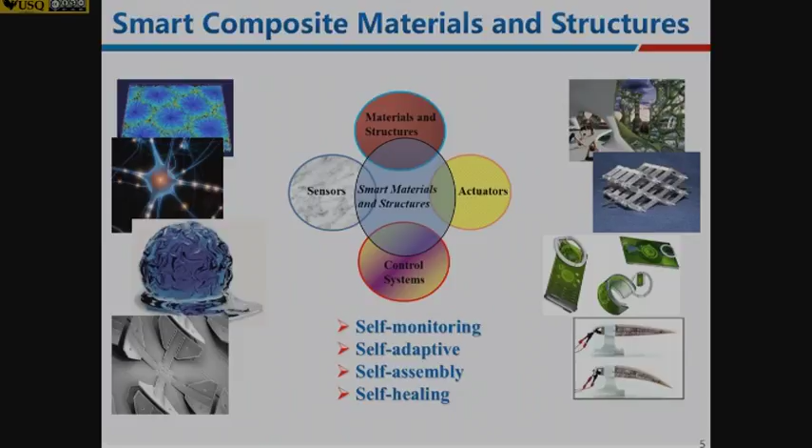Now I can start my talk on smart composites. So what is smart materials? Smart materials involve sensor materials, actuator materials, host materials, and a control system. When the environment changes, the sensor materials can sense the environmental change, then send a signal back to the central system, which sends a control signal to the actuators. These can control shape changing for adaptive structures, and also do self-healing in the future.

For my talk today, I will target the new smart polymer, the shape memory polymer, and its applications in deployable space structures, morphing structures, and other applications. Finally, I'll talk about some other research activities in our research group at HIT.

Let's start with the background. What is the shape memory polymer? It is one kind of shape memory material, based on polymer. This phenomenon is similar to another shape memory material called shape memory alloy. The initial shape for the shape memory polymer looks like this.

If you heat it above the glass transition temperature Tg, the material becomes very soft, meaning you can apply some load to change it to a different shape as desired. If you then cool it down below Tg, the material keeps that shape, meaning energy is stored. Then if you heat it again above Tg, the material recovers to its original shape. All of this phenomenon is similar to shape memory alloy.

But the key difference is that this is a polymer-based shape memory material. I want to show you a few more things: this is a pure polymer, and here it can also be reinforced with composites, even glass fiber or carbon fiber, and so on.

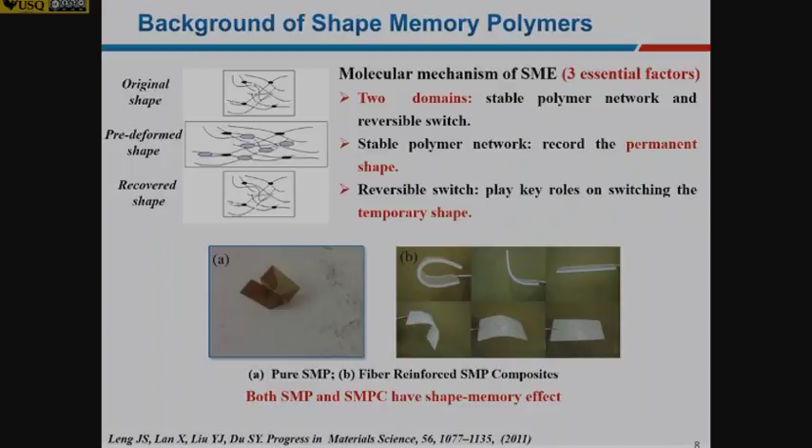So this is a comparison with the shape memory polymer and the shape memory alloy. The polymer, which is called SMP, has some advantages, like low density, large deformation, and also the required stress for deformation is only 1 to 3 megapascal, compared with another shape memory material, SMA, which normally needs 50 to 200 megapascal. Also the transition temperature range is wide, and the processing condition is easy. And very important, the cost is lower than SMA.

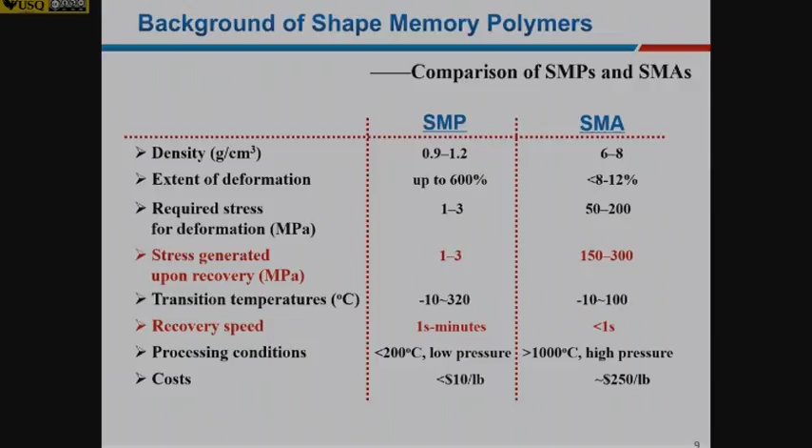But this also has some drawbacks. One is the recovery speed. Another is the stress generated upon recovery is lower than SMA. So the advantages I mentioned for the SMP include low density, biodegradable, and low cost.

But the main challenge is how to drive it. So with SMP, you can heat above the Tg using a heating gun or using water. But for real applications, you need to do something more.

So the solution is you can make some composite. To make a composite, you can have a new actuation method, and also improve the mechanical property and the recovery speed as well. So you take SMP plus filler, and you get a composite.

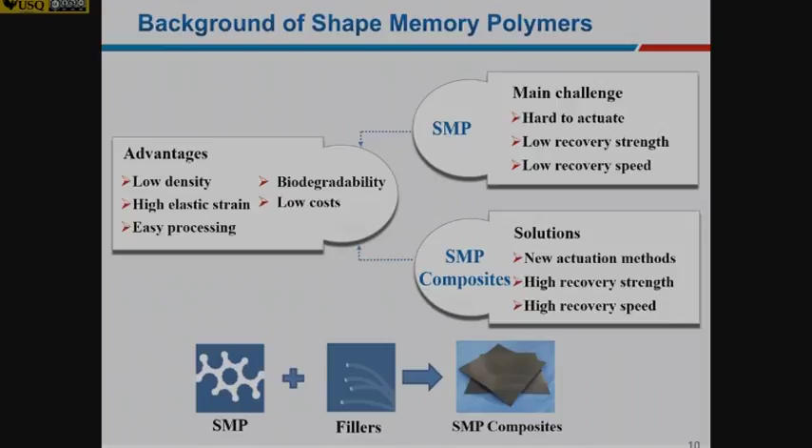So right now around the world, lots of people are working in this area. From Web of Science, you can see about 3,000 papers published. There are a few major research groups around the world.

From Air Force Research Lab USA, they target working with thermosetting shape memory polymers and also some composite structures. From Germany, Dr. Andreas Lendlein's school works on biomedical applications.

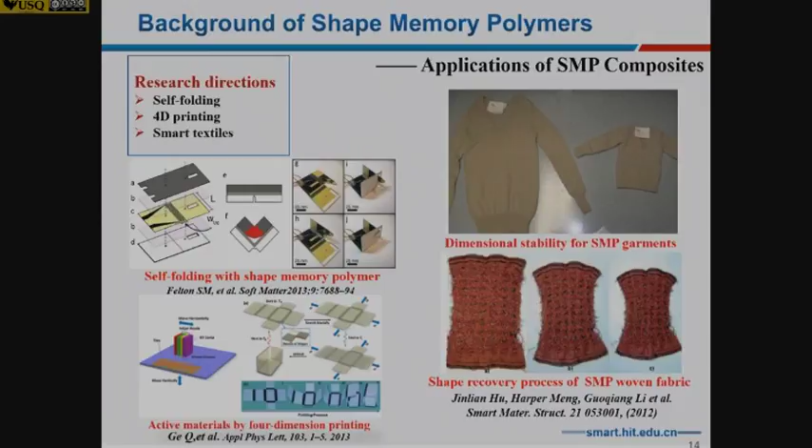And also there's somebody working from the US, Dr. Jerry Qi, working with 4-dimensional printing to print different kinds of smart structures.

So this is another way, using shape memory polymer combined with shape memory alloy. With this one, you can do two-way actuation, one by SMP, shape memory polymer, another by SMA.

The bottom one is from another of my colleagues, using photoresponsive flexible graphene oxide polymer composite. With this one, it looks like an equilibrium apparatus. With light, you can see from the movie this one is changing, driven by the light.

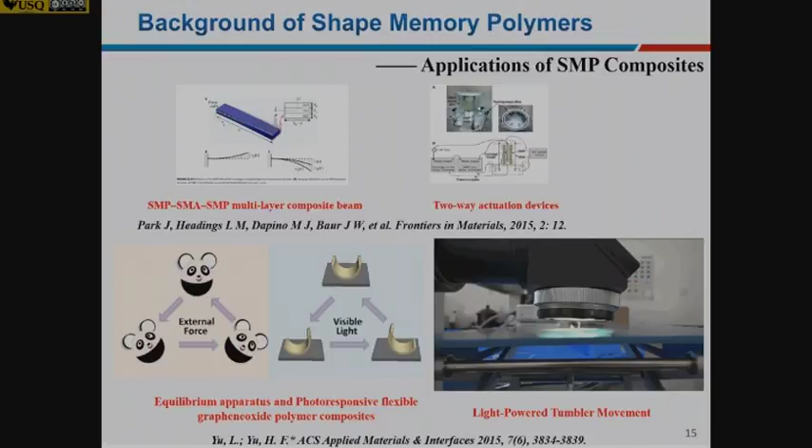So for the polymer, you have pure polymer, so you can do a lot of things. You have polymer matrix, you can make a fiber, you can make a membrane, you can make a foam, also you can make a composite.

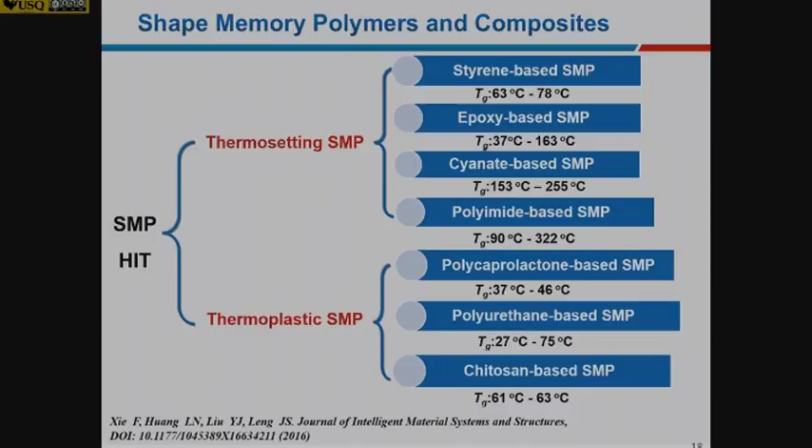So the matrix. In our group at HIT, we start making thermoplastic and thermosetting shape memory polymers with different transition temperatures. We start using polystyrene, which has a transition temperature around 70, then we go into epoxy, cyanate ester, which is around 250 degrees for the TG. And now we develop a polyimide, which goes to a higher transition temperature for SMP, 320. We also produce some thermoplastic shape memory polymer, which is used for potential biomedical applications.

So I'll take some initial published papers to show you what we have done during the last few years. This is a cyanate ester based high transition temperature SMP, so the range is around 250, and also we can see the recovery ratio is 98%. We also produce some polyimide, and with the polyimide, you can see the transition temperature is around 320. This one is also good with UV resistance. You can see with just 10 seconds, the sample can deploy.

And also recently, we published a paper in Soft Matter for the optic transparent high transition temperature polymer. This one is optic transparent, you can see this, and also I want to play the movie for you. I'm not sure if that one is working. Maybe I need to come back. Okay, I'll show you later, because this one is very useful for the future mobile phone.

Because in the future, we have something like a transparent and flexible mobile phone. The polyimide is a very good substrate to make that. So if we can have a flexible shape memory polyimide, we can make a lot of optical devices, especially for the flexible optic devices, like a mobile phone or something.

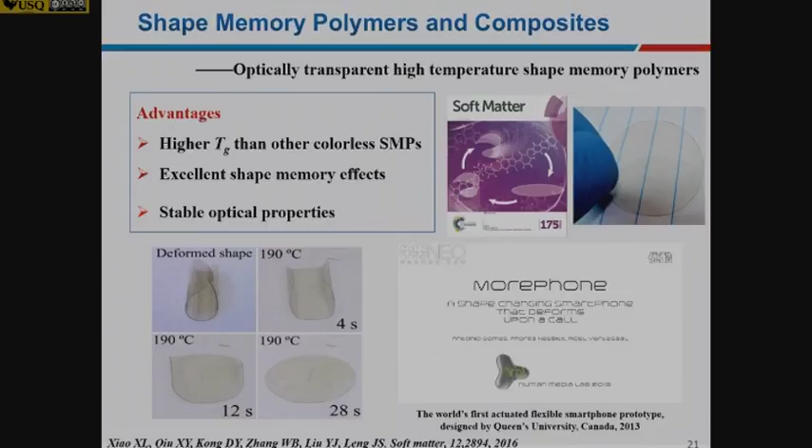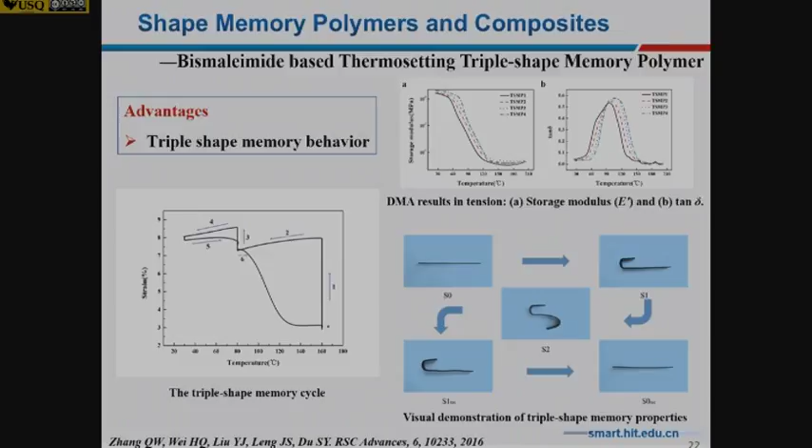So we also made some bismaleimide, BMI, which also has a triple shape memory behavior. That means normally shape memory polymer has just from 0 to 1, which is just one transition temperature, but with this one you have 2. That means this polymer can remember 2 or 3 shapes, so we call it triple.

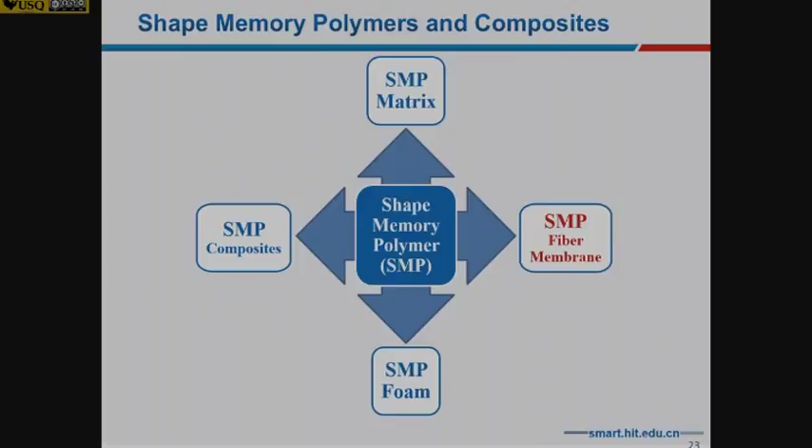And we can also make membrane, shape memory polymer, and fiber as well. So let's take some examples. This is one we made, a multi-shape shape memory polymer membrane. You can see from 160 degrees, 135, 110, they have different shapes, which means this one can remember 3 different shapes.

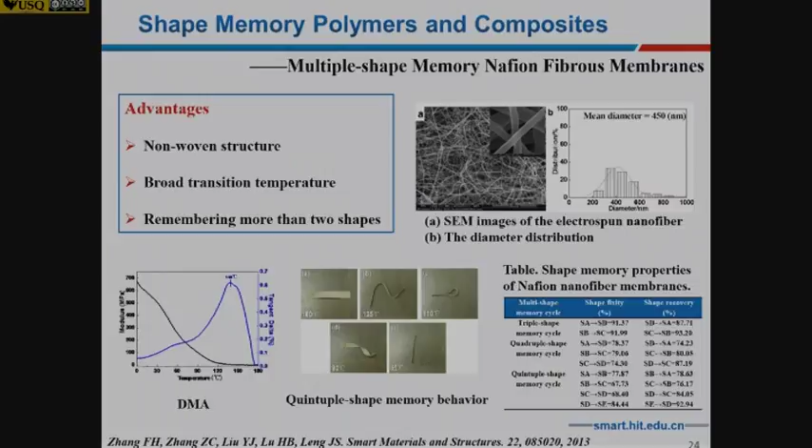And also this one, we made a core-shell shape memory polymer fiber. The initial idea is we have the shape memory polymer made by epoxy, which is shape memory, but this one is not biocompatible. So we make a core-shell with PCL together, and with this one you can have biodegradable property, biocompatible property, and also very fast shape recovery time.

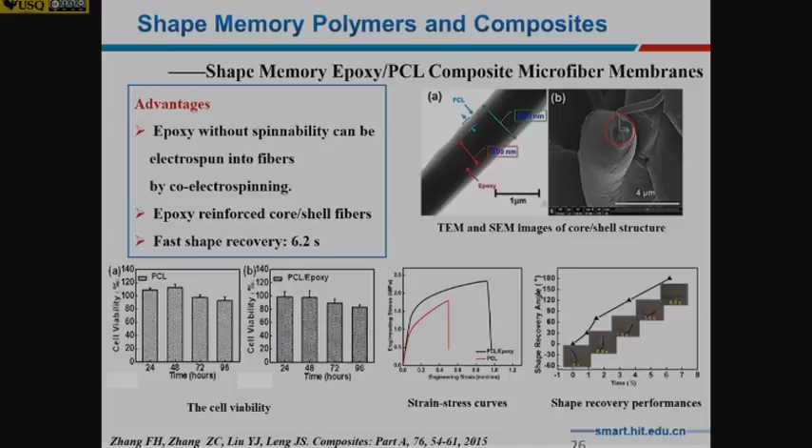And also we can make some foam. You see the foam made by PCL, and the initial temporary shape has 1 centimeter and 3 centimeters, and you can have a temporary shape of 1 centimeter. Then when you heat it by microwave or by water, this shape can change.

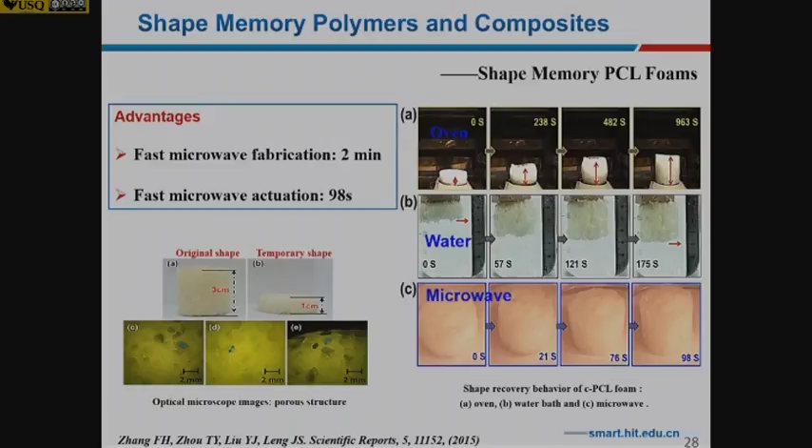So we also can make another one, which is polyurethane foam. With this polyurethane foam, the compression ratio can go up to 90%.

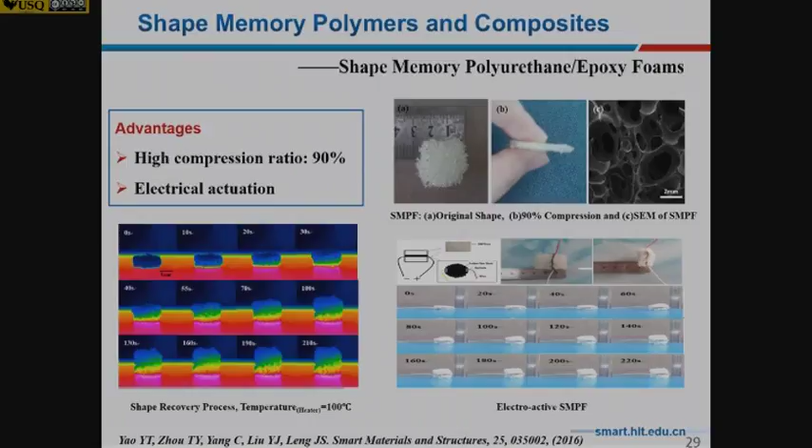So then we can make a composite. To make a composite, we can use a lot of different fillers. We can use nickel powder, carbon black, carbon nanotube, carbon nanofiber, or we can use graphene and reduced graphene oxide paper for electrical actuation during Joule heating. We also can do water actuations or magnetic actuations by using iron oxide, and also light actuations and microwave as well.

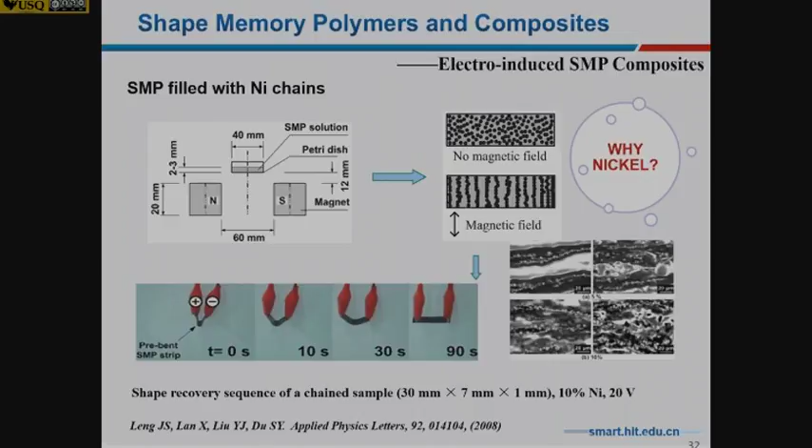Then you can simply apply some voltage to deploy this one.

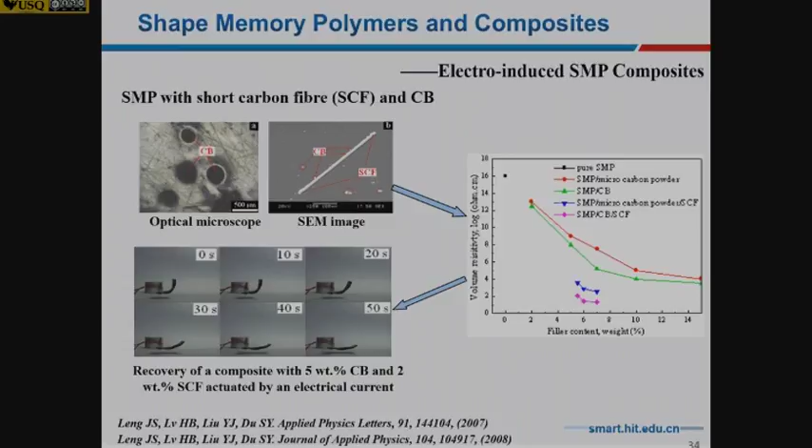So we tried a lot of different conductive particles. I don't want to say everything, but we tried a short carbon fiber with carbon black. You can see the volume resistivity down to 2 ohm centimeters, which is just 7% of the filler content.

For existing work, normally you need to distribute the particles inside the polymer homogeneously. But the problem is you cannot have too many particles, because they will reduce the other mechanical properties.

So the idea is we propose using another conductive element, which is called a buckypaper. The buckypaper is made purely of nanotubes. It has very good conductivity, so we can laminate it. This one is a composite, using the buckypaper as both a heating and a conductive element.

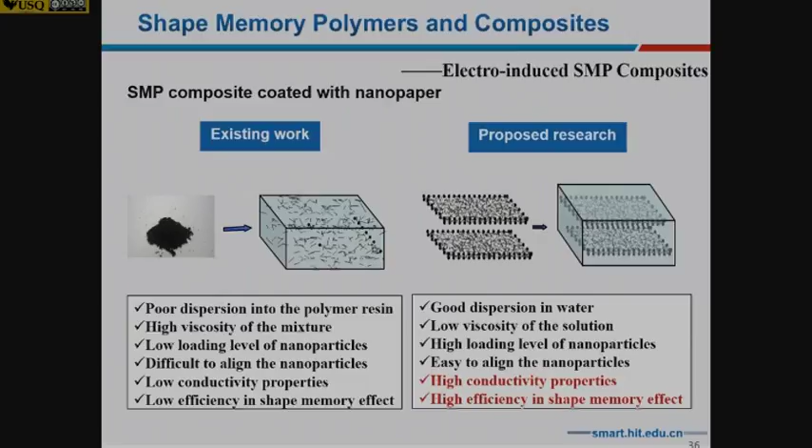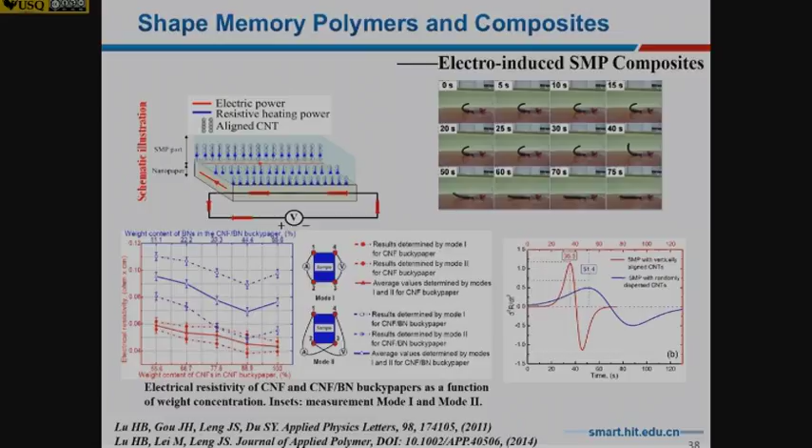We also grew some nanotubes just between the buckypaper and the composite SMP. The reason is the SMP and the buckypaper have different thermal conductivity, so we grew nanotubes just in between. This improves the conductivity, and you can see the induction time is reduced.

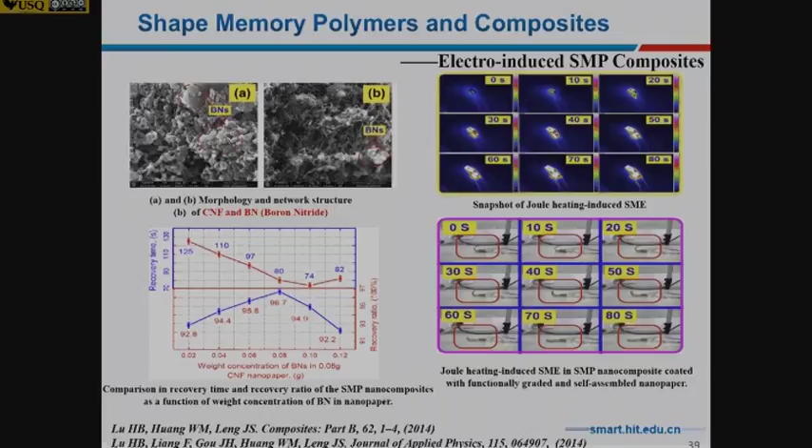We also tried different conductive particles, like carbon nanofiber plus boron nitride. The reason we're using boron nitride is it has very good thermal conductivity. With this one, you can see the sample can deploy from 0 seconds to 80 seconds very easily.

So this is another one where we want to do multifunctionalization. Because the composite is conductive, you can simply measure the resistance change if you apply some temperature or other stimulus. So this is a sensor, and this one can also change shape if you apply some stimulus.

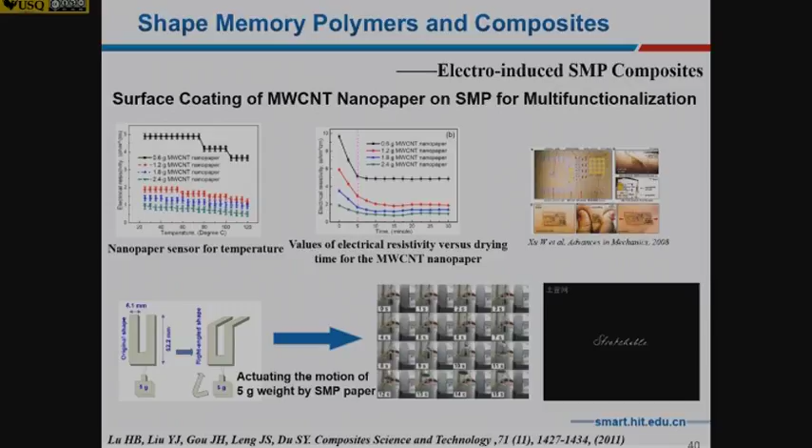You can see this is a mobile phone in the future. The mobile phone will be flexible and wrapped to your arm. So if we have the shape memory polymer as a substrate, in the future we can deploy this one easily.

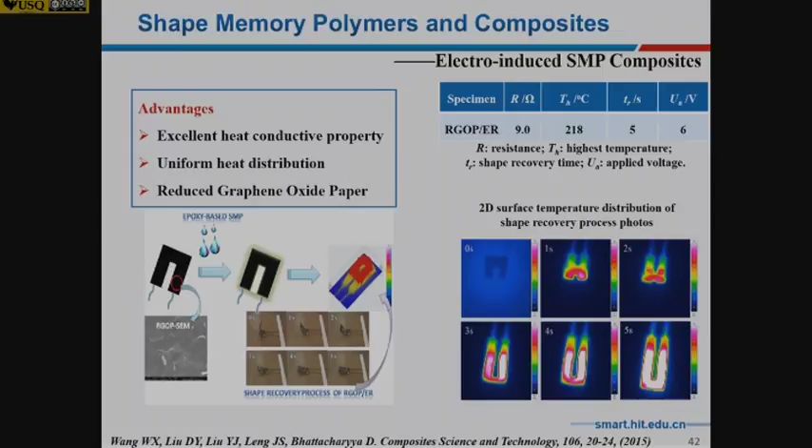We also tried another conductive paper, which is a reduced graphene oxide paper. For this one, it's all very fast. The graphene has very good conductivity. You can see the temperature distribution, and applying some voltage, this can deploy very easily.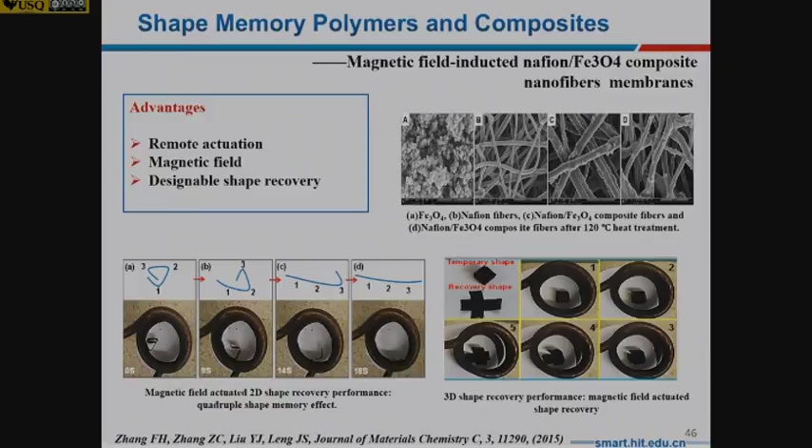So this is another idea using magnetic field. Since we're using iron oxide, which easily absorbs magnetic field, this can change in shape. You can see the polymer shape changing from A to D, the shape can deploy and change. So another design, you can consider mechanics with different magnetic particle volume and particle size to give different driving performance for the magnetic field.

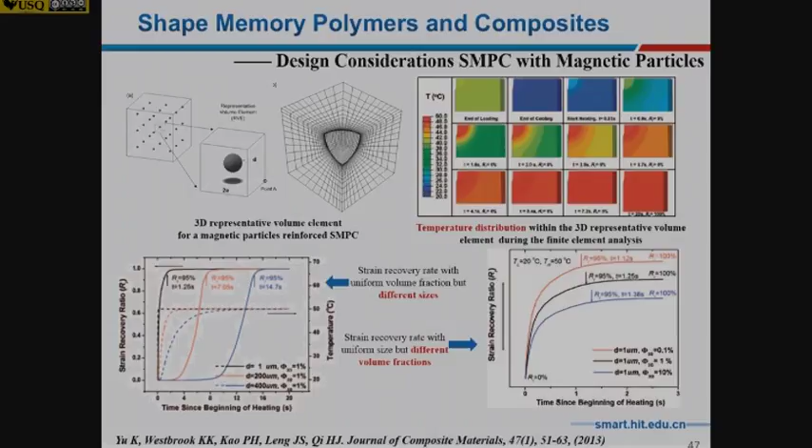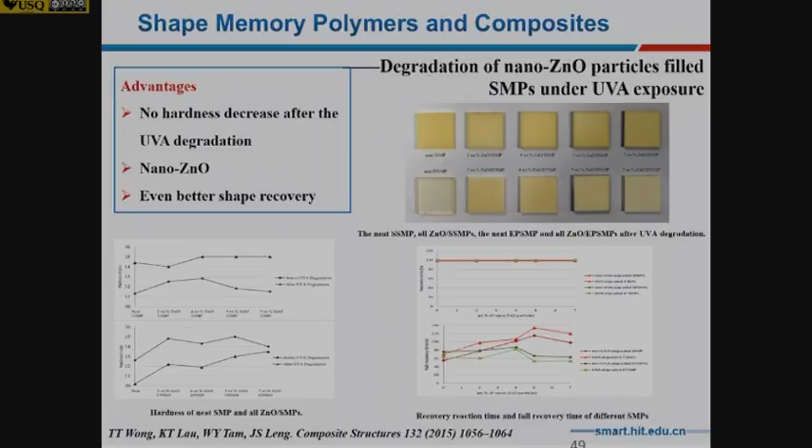We also collaborated with Lau, using nano zinc oxide particles to improve UV resistance, because zinc oxide has good properties to resist UV light. With this, we find the nanoparticles reduce degradation after UV exposure for the composite. This means you can try many composites to give different properties for the shape memory composite.

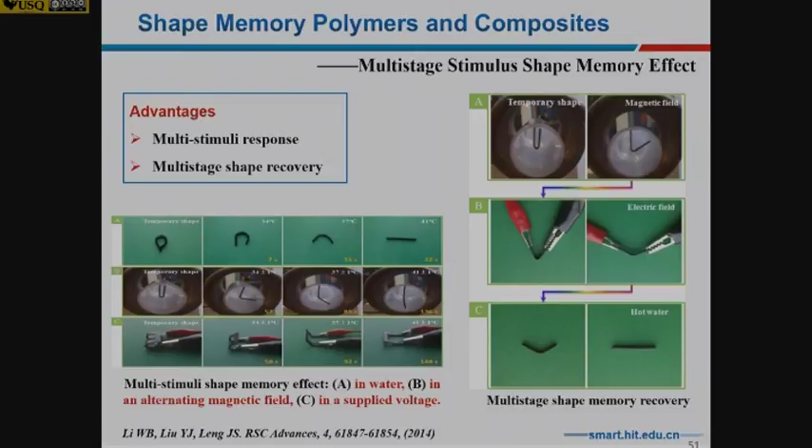We also made a self-healing composite with shape memory property together. For shape memory, you can see from the graph the shape can recover, but not only shape recovery - we put some thermoplastic polymer inside, which can heal cracks. You can see the crack there, and afterward the crack disappears. The self-healing efficiency is about 70%. This means the polymer can not only recover its shape but also heal cracks.

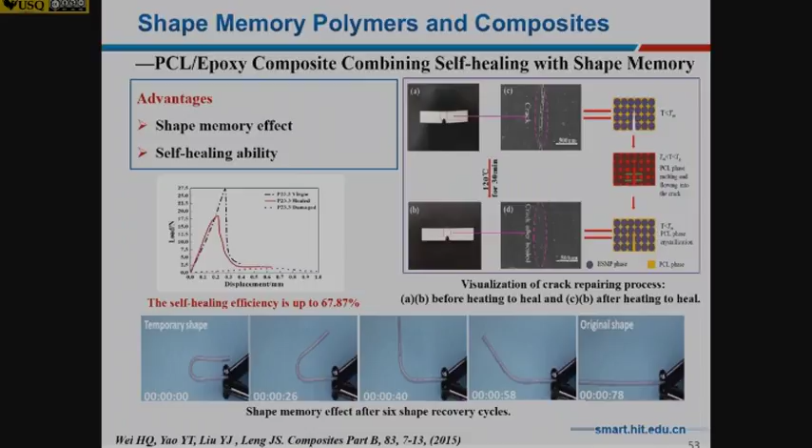Now I'm going to talk about some applications. The first application is deployable structures. Traditionally, you see this big antenna, 9 meters in diameter - very big. Traditional antennas use mechanical devices and complex structures, and to deploy, normally use explosive bolts, which are not very steady and have dynamic impact on the satellite body. For SMP, you can easily design it and just change shape upon a stimulus, which is normally temperature or magnetic field.

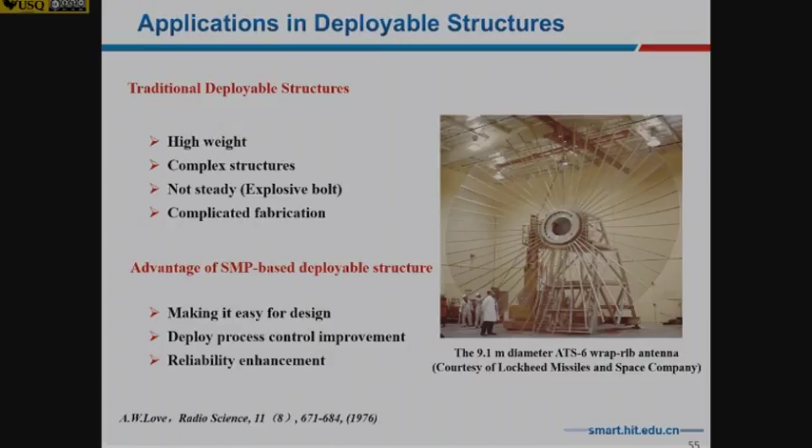But before doing that, we target a very harsh space environment - vacuum, radiation, atomic oxygen, and temperature variations. Here is the satellite, with the deployable antenna and deployable hinge, which normally uses explosive bolts. For low Earth orbit, the temperature is normally from -100 to 100. For high Earth orbit, we talk about -170 to 170 degrees Celsius.

That's why we develop different polymers to adapt to different temperature ranges. For epoxy, the temperature range can go up to 150, so that can be used for low Earth orbit, which is normally -100 to 100 - our epoxy is within that range. But that epoxy cannot be used for high Earth orbit, because high Earth orbit temperature is from -170 to 170. That's why we developed another higher Tg polymer, cyanate ester, up to 250.

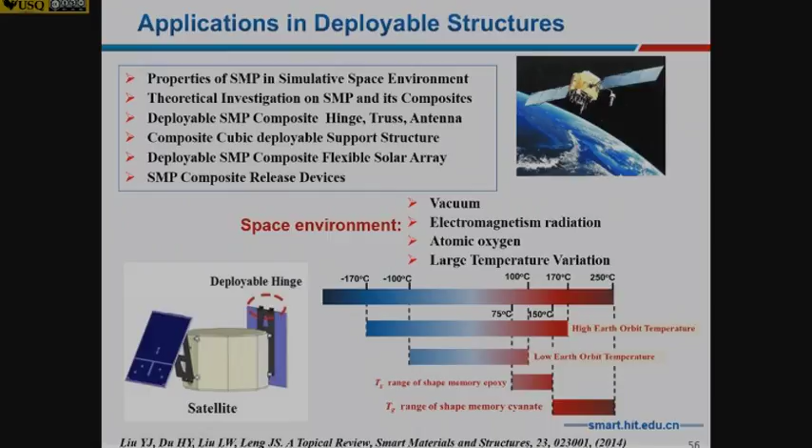So this is some published work for the epoxy-based polymer after gamma radiations. We can prove after different doses of gamma radiation and temperature cycling how the polymer performs - the recovery ratio, the mechanical property, the shape fixity. We prove that it's still okay after radiation at the temperature cycle. That means this one can be used in space for future applications.

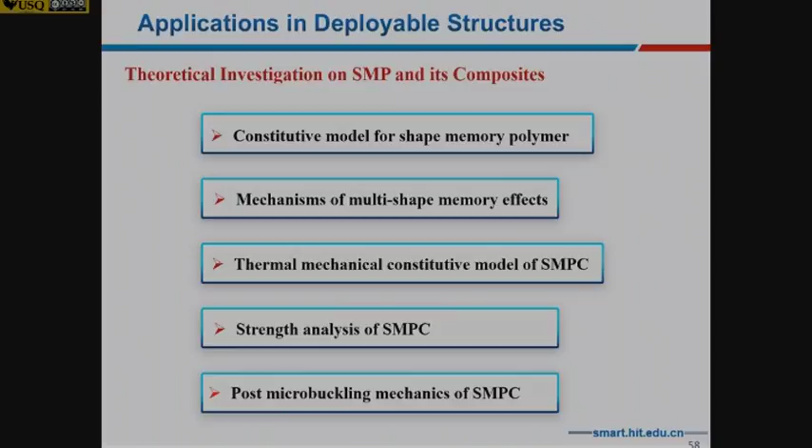We also did some theoretical work for the SMP and its composite - constitutive models. We started with the model of the shape memory polymer, the mechanism of the shape memory effect, and also the composite. So we do strength analysis and also post-buckling. I don't want to go into details, but I want to show you some models.

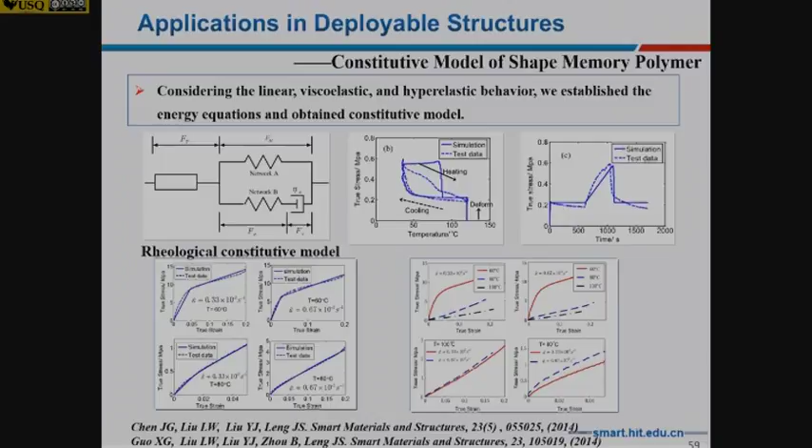This is the constitutive model for the shape memory polymer. Also, we try to simulate the multi-shape memory effect by using the standard linear solid model, which is there. You can see this one - we can simulate the triple shape memory effect.

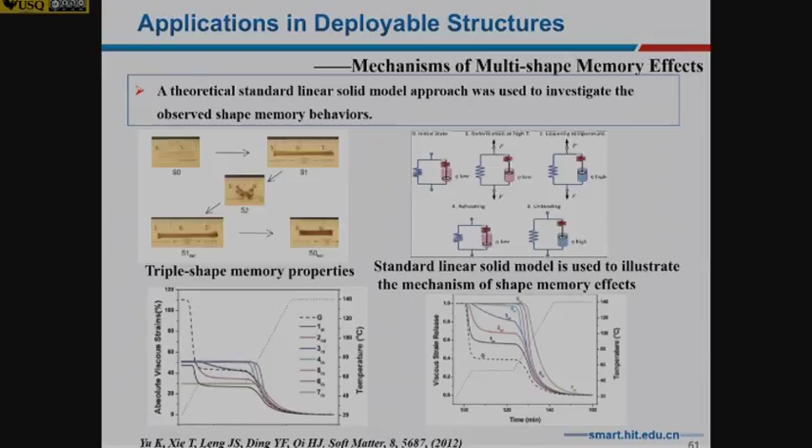And this one is a composite, so thermal mechanical constitutive model for the composite shape memory. You can see the glass phase and the rubber phase. I don't want to go into details, but this one is post-buckling, because for composites it's very important for the buckling. You can see the single fiber, you can see the polymer after buckling. So what we have to do is predict the wavelength and the amplitude of the buckling.

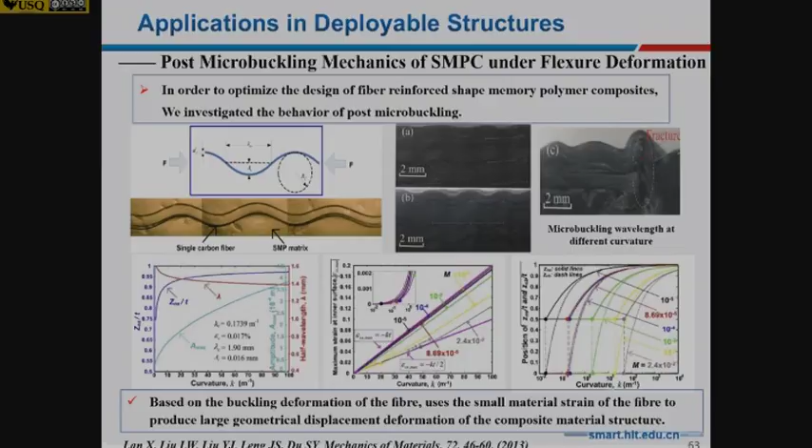So then we did some prototype design. This is a prototype design for a shape memory polymer hinge. From this one, you see the hinge is initially folded and then deploys after maybe 80 seconds, which you can control. And with this hinge, you can control the solar cell panel deployment just by heating.

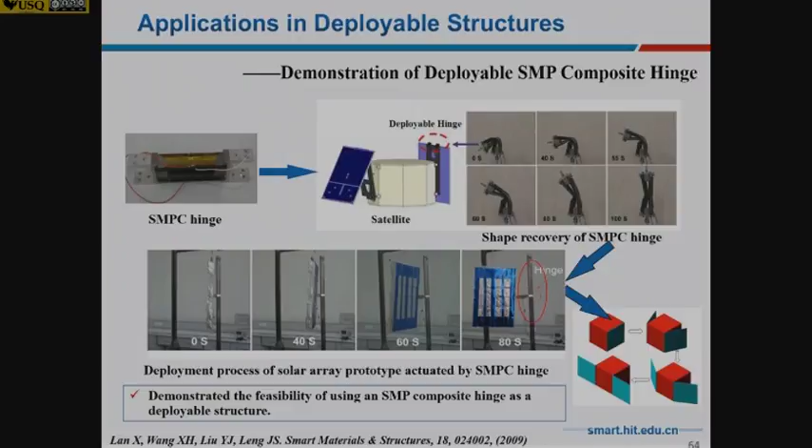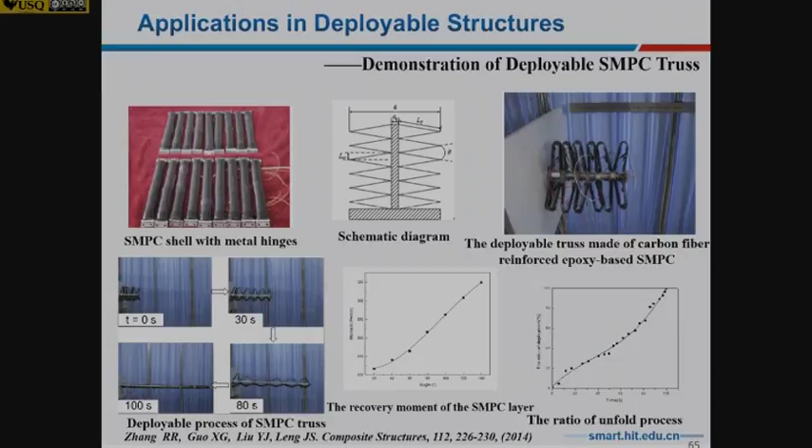We also made some truss structures. You can see the truss also made by composite plate. It's folded together, then afterward - you can see from the bottom one, from 0 seconds to 80 seconds - the truss can deploy if you simply apply a heating source.

We also made some release devices. The basic principle is like two parts, like my fingers holding together. If you want to release, you simply change this shape, then it can release. And also this can come back and lock.

So then we're going to talk about some applications in morphing. This one is a morphing aircraft by NASA. They want to have this concept by 2030. So in the future, the aircraft hopefully can change shape if you want.

And can I play another movie, please? Nobody here? Okay, it's coming.

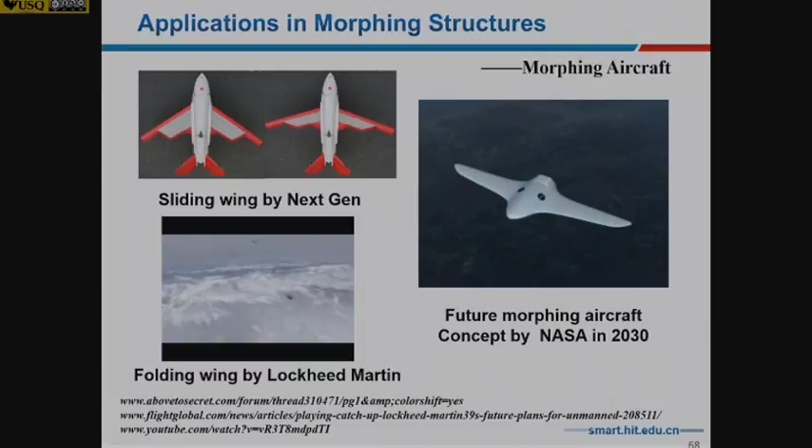You can see this is by Lockheed Martin. They want to have this UAV fold a wing, and then after the mission, deploy again to come back to the normal status.

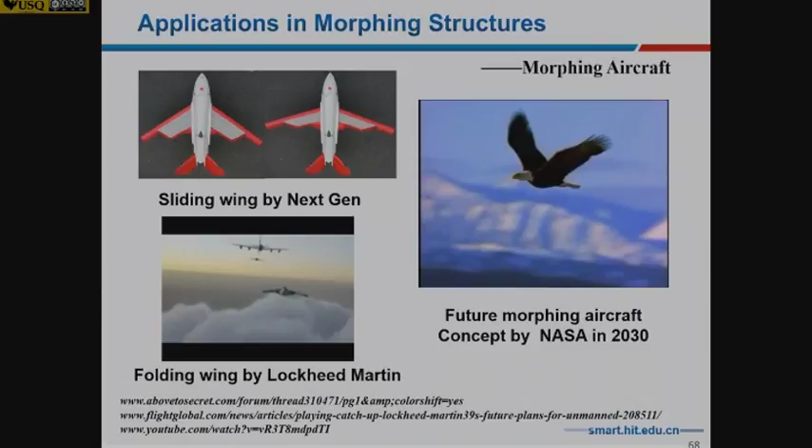But the target for this one is very important - the morphing skin. Right now, the next gen company is working with flexible skin using rubber. But the problem for morphing is you need shape changing, which requires low stiffness. But low stiffness means you can change your shape but cannot stand aerodynamic load. High stiffness means you can stand aerodynamic load but cannot change your shape.

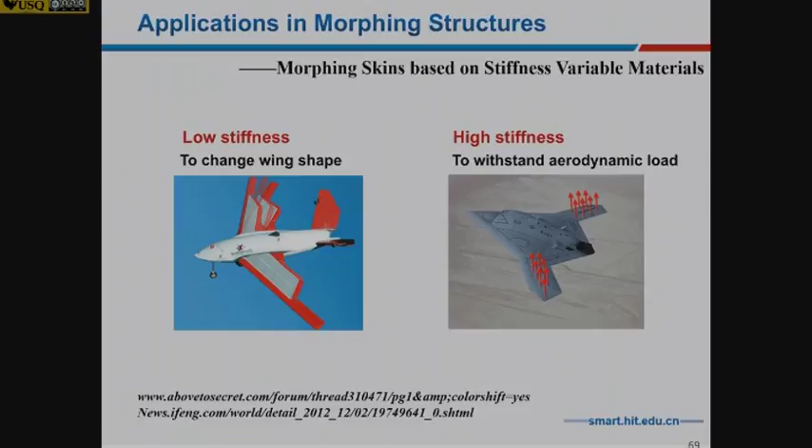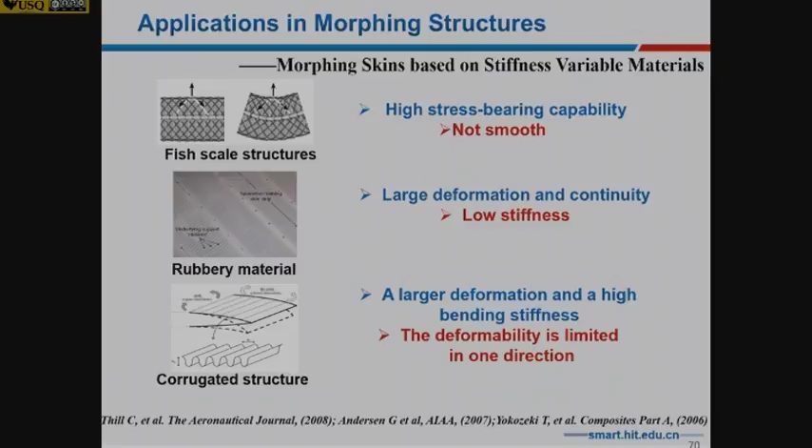So that's why we need stiffness-variable materials. If you want shape changing, you need low stiffness. If you want to stand higher aerodynamic load, you need high stiffness. Right now for morphing skin there are at least three approaches. One is called fish scale structures, which is like fish scale but not smooth. Another is rubber materials, which can be reinforced with filler, but that has low stiffness. Another is corrugated structures, but the thing is it only changes in one direction. So what we propose to do is use shape memory polymer.

Remember this one in the very beginning, SMP can change in stiffness from very hard to very soft upon the stimulus, then you come back. So we're not using SMP to drive the morphing structures, that's too heavy. But we're using this one to change the stiffness, as variable stiffness materials.

So we've done some work with morphing skins using pure polymer, but we found pure polymer has some problems. So we reinforced it with spandex. The reason we're using spandex is it's very flexible.

So we also make some tube. The tube is also made by shape memory polymer composite. The tube can change in stiffness. So we embed the tube in some soft polymer like elastomer, so this polymer can change in stiffness.

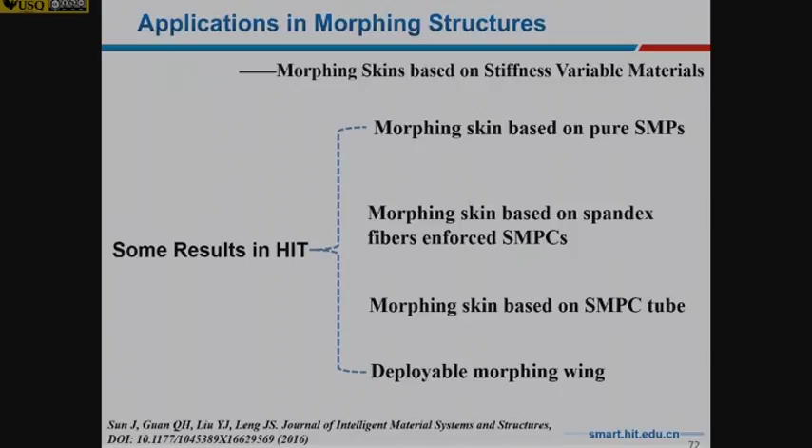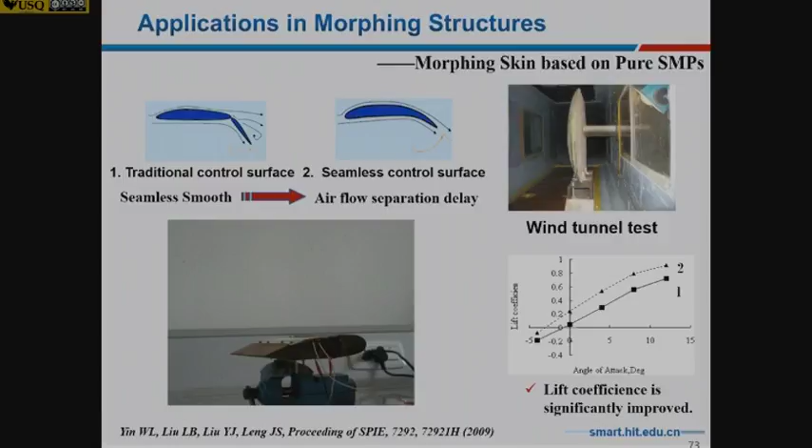And also we make some deployable wing. You can see this one we covered with SMP, and we do wind tunnel testing. This is initial work.

Then we go to the spandex-reinforced shape memory polymer composite. With this one, you can improve the tear strength using the flexible elastic fiber, which is spandex.

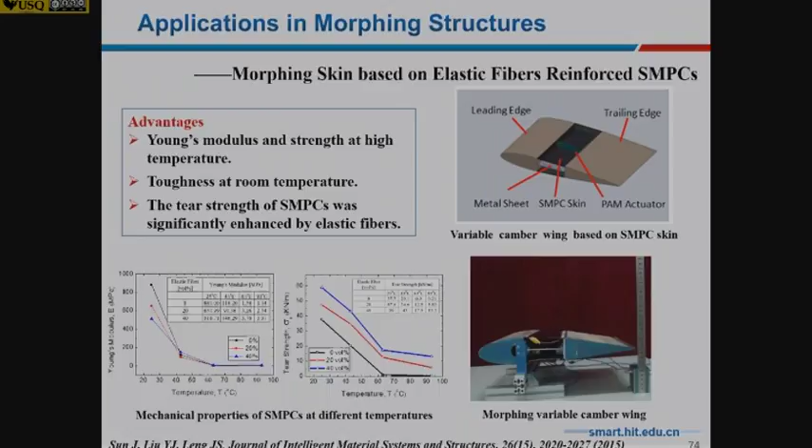We make some deployable morphing wing using shape memory polymer and foam. You can see the foam can change in shape. That means it's not only deployable for the wing, it can also change the airfoil. You can see the airfoil can be changed.

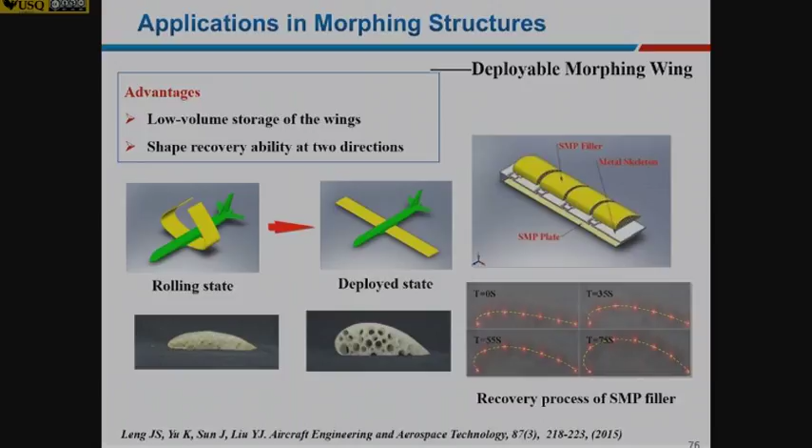So, other applications. The first one I want to point out is the smart mandrel. This has a lot of applications. Normally to do composite structures, like pressure vessels, complex structures, when you do filament winding, you have to have some mandrel.

But the mandrel normally you can make either by the water-soluble mandrel, which can dissolve by water or other solution, or you can make a multi-piece metal mandrel, which can be assembled and disassembled, but it's very complex. So people from a USA company called CRG made this one.

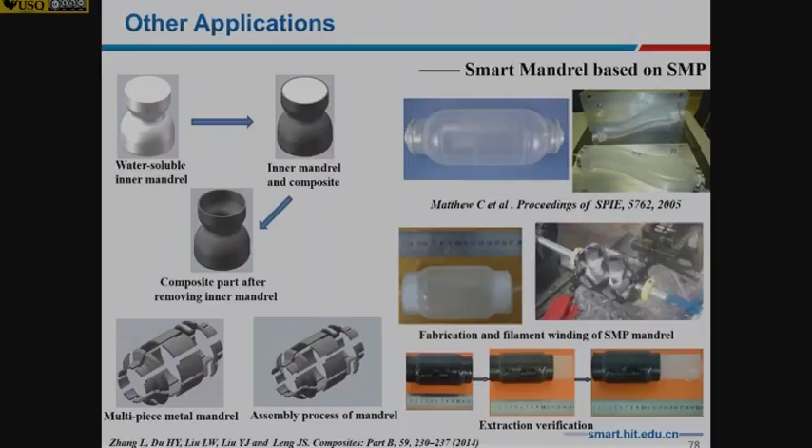And on the right hand side is another air inlet. For this one, you can do the composite structure, then release it after you do filament winding. And the bottom one, our student made, doing filament winding with a similar idea, and after that you can release and take off the mandrel easily.

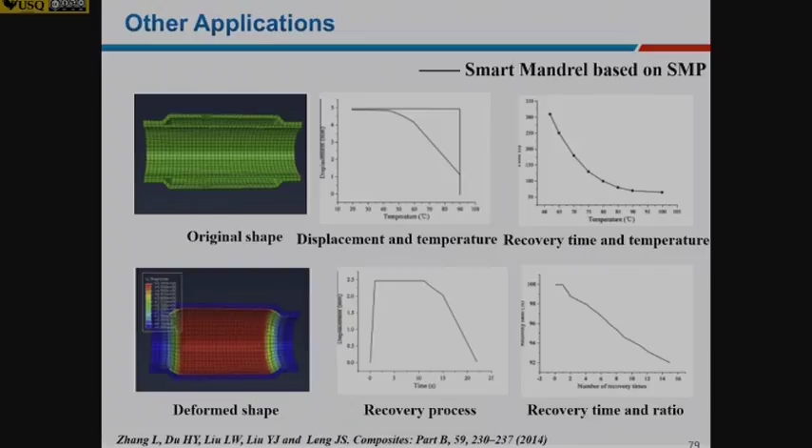And we've also done some simulation work using FE modeling to see the deformation and stress distributions. So this is another one for the air inlet.

You see one side is circle, another side is rectangular, so normally it's not easy to take off after doing filament winding. But with this one, SMP does the filament winding, and after that the polymer becomes smaller and soft, then it's easy to take off from the composite tube inlet.

So we've also done some simulations. This is another one we call adaptive fracture external fixator based on SMP.

When you have a broken bone, it has an original state with swelling, and when the swelling goes down, the shape is reduced. So using shape memory polymer we can fit this. If you're using a plaster, normally the plaster cannot change shape, but with this one, you can change shape.

And also for the joint, you can move to exercise, which plaster cannot do.

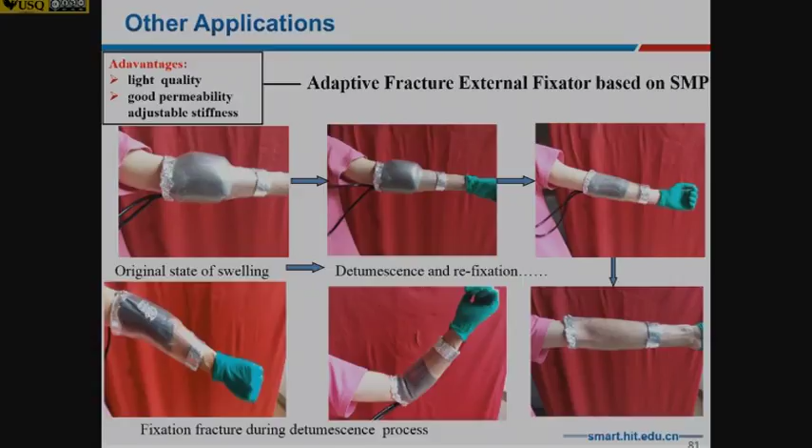So the idea for us is we made some shape memory polymer sheet and film, very thin. Then we heat it and it becomes soft, then we use a pen to make some dots. Then you reverse it, and you can feel what it means. After that, you can reuse it by heating again.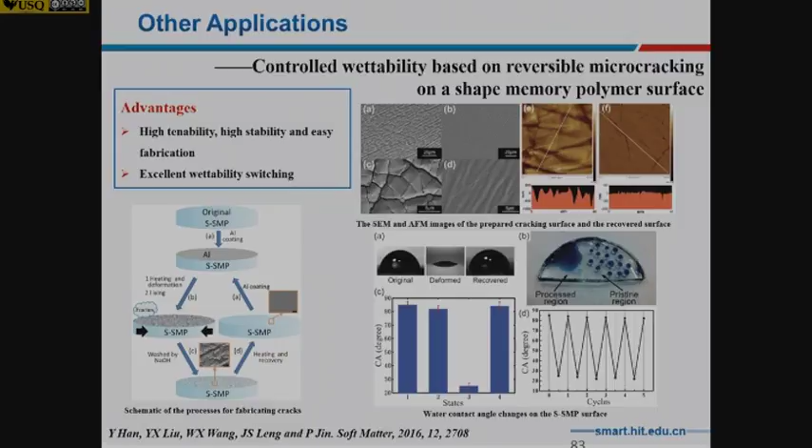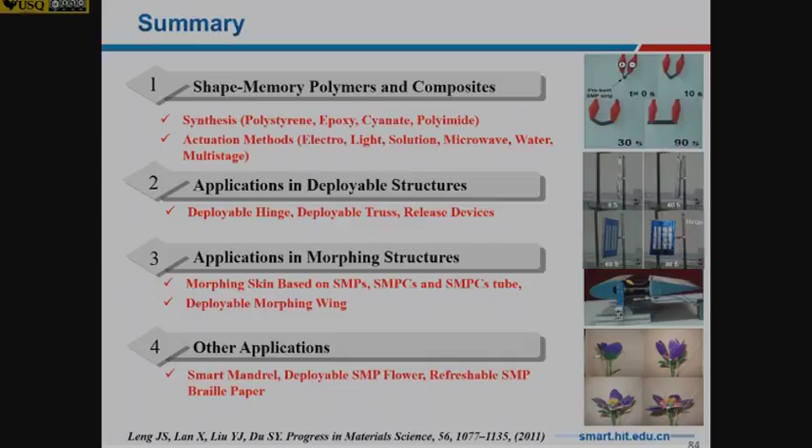So with that, I want to summarize. We talked to you about shape memory polymer. In our university, we can do synthesis, composites, deployable structures and morphing structures, and other applications.

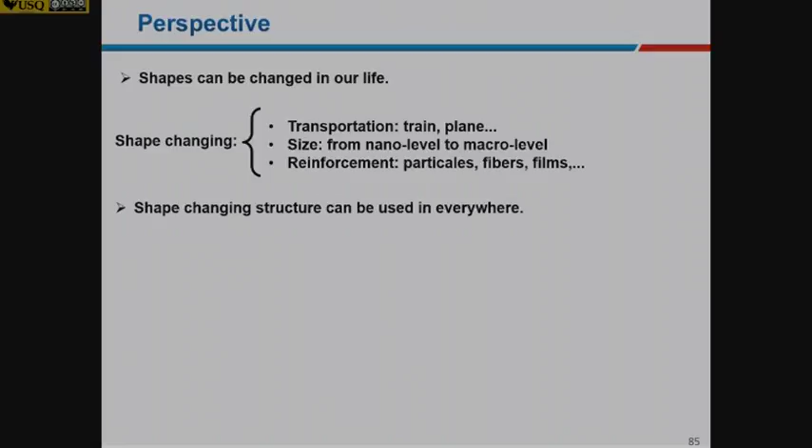So I think for the future, shape can be changing in our life, changing whatever - like cars, like trains, like transportation, like planes, or something you can see like the transformers.

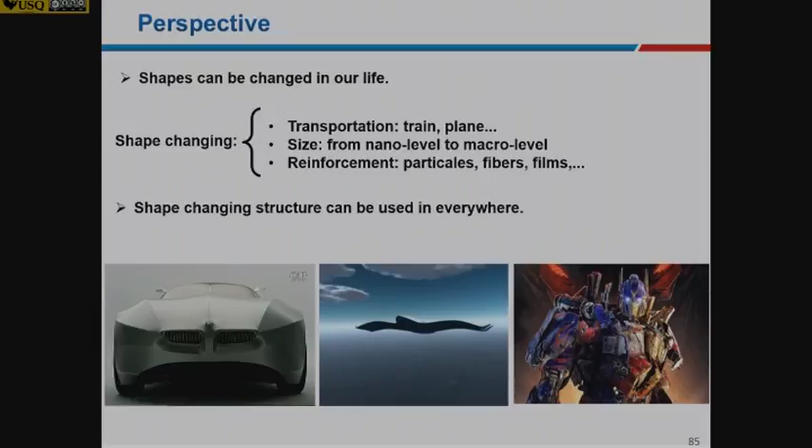So size can be small, from nano to macro to micro. And the reinforcement can be like a particle, fiber, or film. So shape changing can be used anywhere. I also want to introduce some other research activities in our research group.

The gripper is made by EAP, the electroactive polymer, and they can grab something.

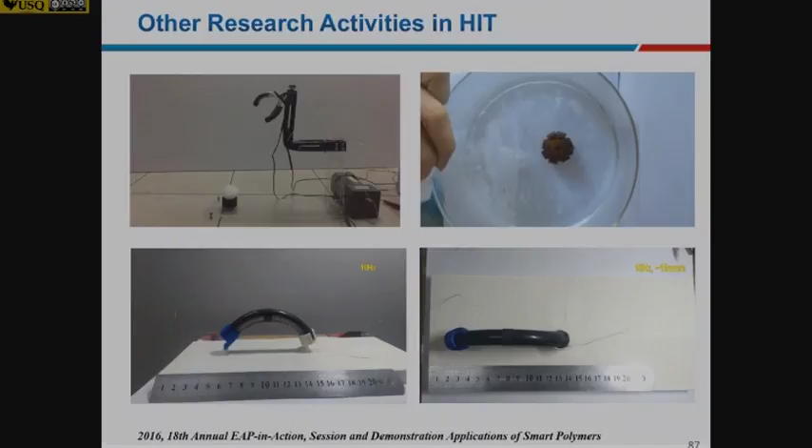This was demonstrated this year in Las Vegas. This one is another one, it's called flower, and you can see this flower can deploy. And this one, you can see it crawl, and this one as well, can move.

We also made some pneumatic muscle fiber, which we embedded in some composite. You can see this one can also change shape - these are actuators. We also made some piezoceramic pump, which is here.

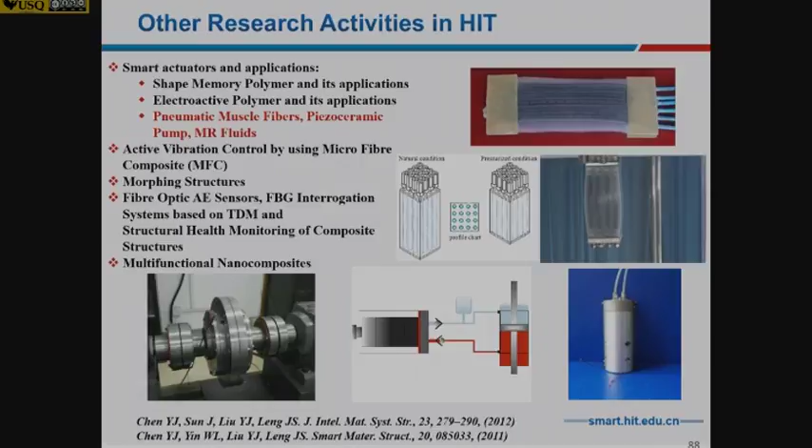This one is called the pneumatic muscle fiber, PAM. We have some collaboration with the University of Maryland. Sorry, there's no movie playing, but you can see it. It can lift, and you can also grab some things with this PAM.

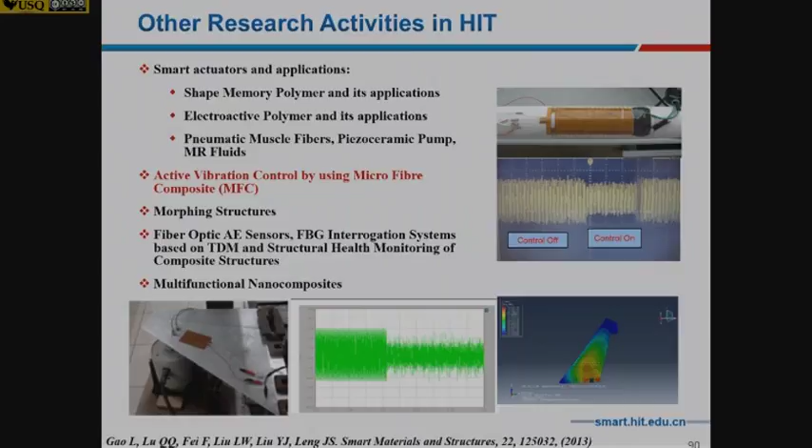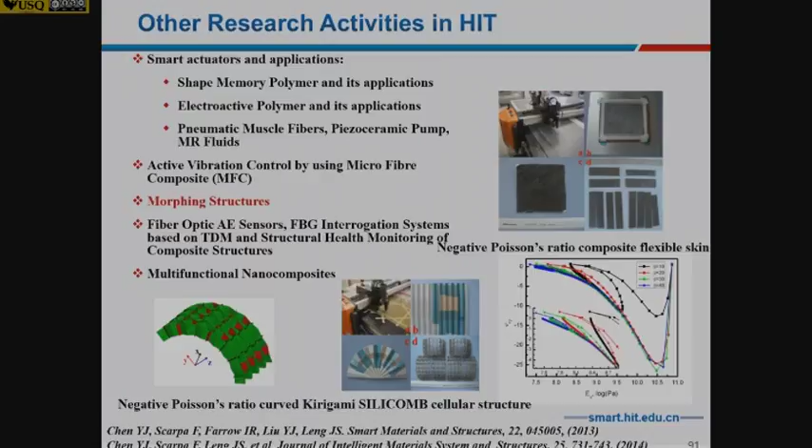We also have some work on controlling vibration by microfiber composite, and some morphing structures, like this one, called the Kirigami SILICOMB cellular structures, and also this one with negative Poisson ratio design for the flexible skin.

We're also working on fiber optic sensors. With fiber optic sensors, we do something based on TDM, time division multiplexing. With this, in principle you can get 1,000 sensors in one channel.

So this is another design. We're also working on acoustic emission sensors, for when you have some impact and damage. You can locate the location of the impact using the acoustic emission sensors.

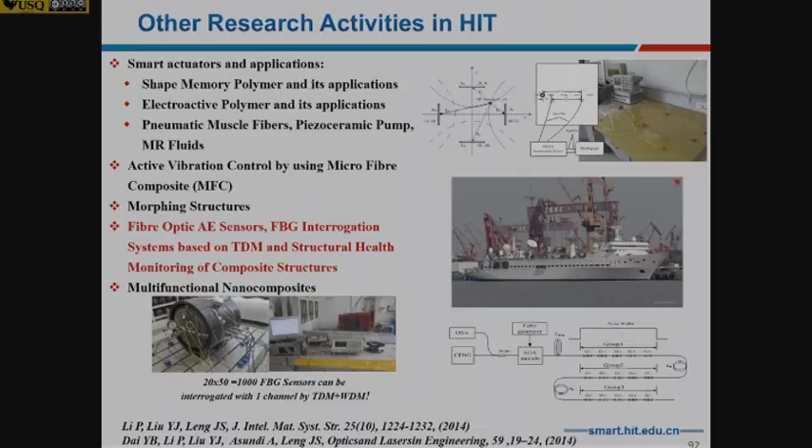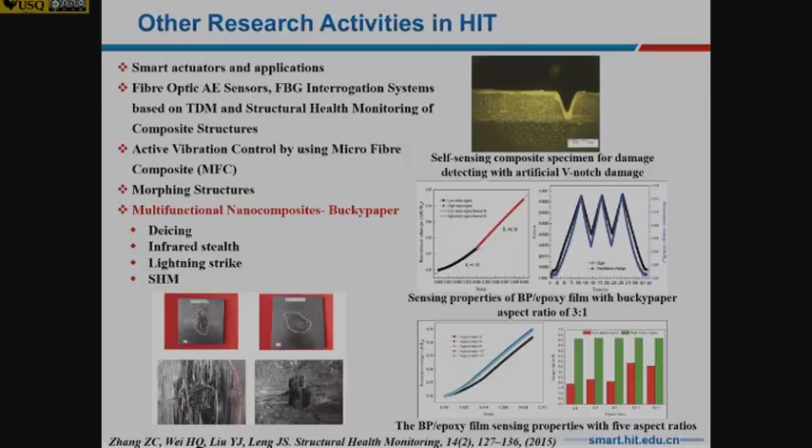In the future, we can also do lightning strike protection. This is a preliminary result with buckypaper and without buckypaper. You can see it's good for protecting against lightning strikes, and it can also do structural health monitoring - simply measure the electric resistance, and then you can measure strain and stress.

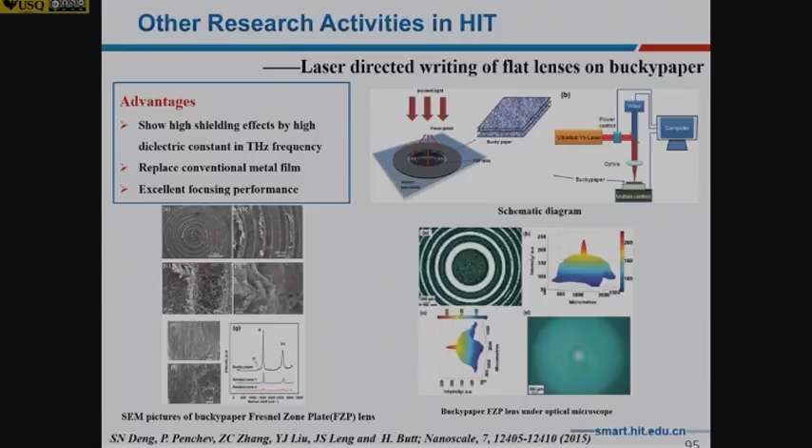This is another one, we collaborate with the University of Birmingham using buckypaper to make some flat lens, called a Fresnel zone plate, FZP. We use laser direct writing to make this lens, because buckypaper has higher shielding efficiency in the terahertz frequency range. With this, you can replace the conventional metal film with this lens.

We're also working with electrospinning. We can do a lot of things with electrospinning, it's very useful.